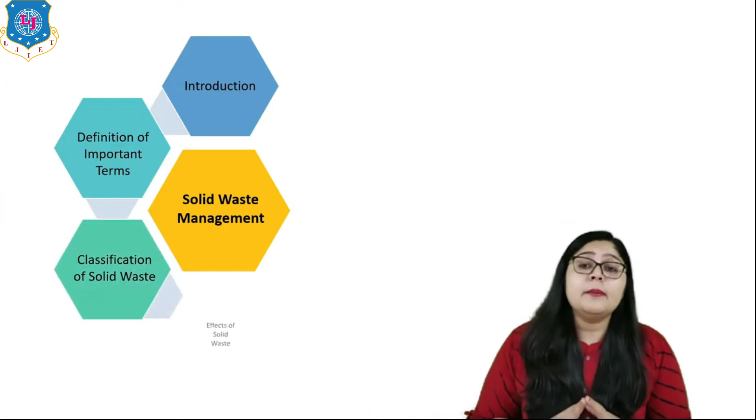Today, we are going to discuss advancement in civil engineering, lecture number 3. To understand solid waste management, first we have to understand the concept, the introduction. Then we will see definitions of important terms, then the classification and effect of solid waste, and lastly the quality and composition as well as the steps required for solid waste management. Let us begin with the introduction first.

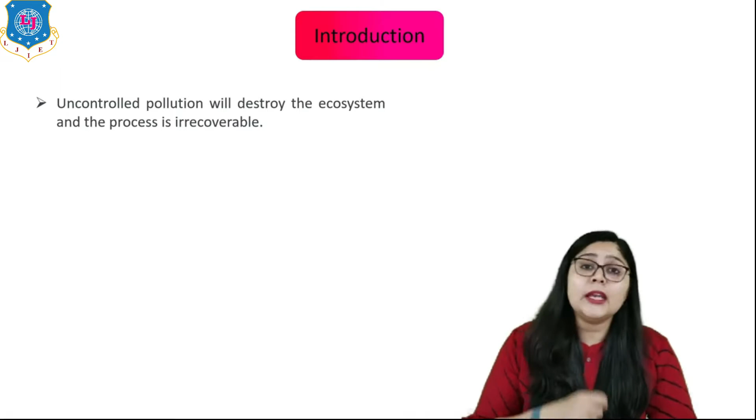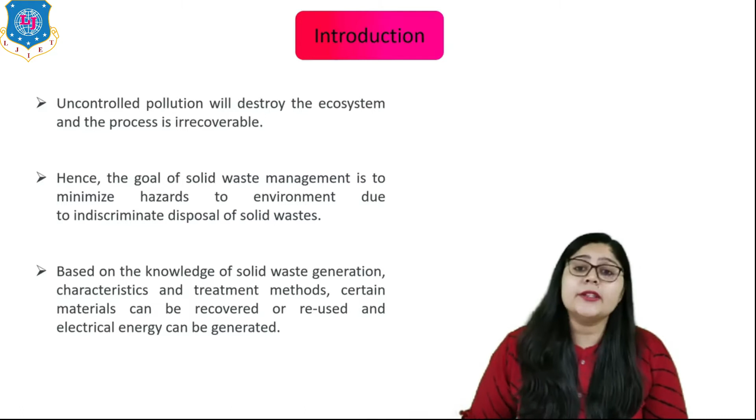For solid waste management, I can say that uncontrolled pollution destroys the ecosystem and the process is irrecoverable. So the goal of solid waste management is to minimize hazards to environment due to indiscriminate disposal of solid waste. Based on the knowledge of solid waste generation, characteristics and treatment methods, certain materials can be recovered or reused and electrical energy can be generated. So this is all about the introduction.

Now let us see the definition of important terms. The first definition is known as refuse. What is refuse? Simply, it includes all kinds of waste in solid state, excepting excreta, coming from residential, commercial and industrial areas.

The second term is house refuse. This consists of vegetable waste, ash, cinders, rubbish, debris from cleaning, animal waste matters, or debris from demolition of structures, which are part of house refuse.

The next term is street refuse. It consists of street sweeping, tree leaves, empty packets, empty match boxes, fruit peels, etc., considered as street refuse.

And lastly, the trade refuse. It consists of solid waste from industrial factories, businesses and commercial centers. So these are the refuse types: house refuse, street refuse and trade refuse.

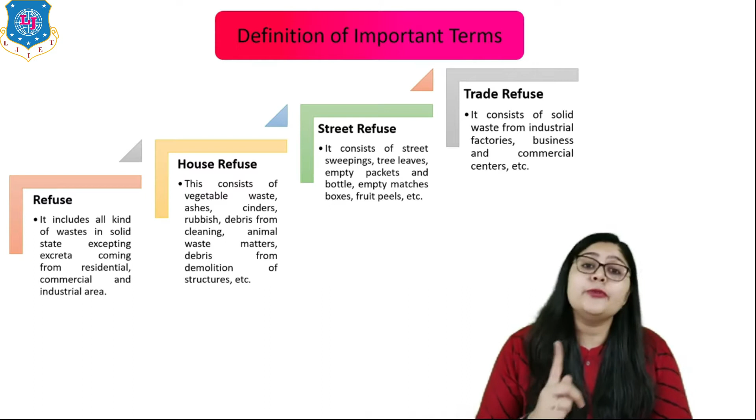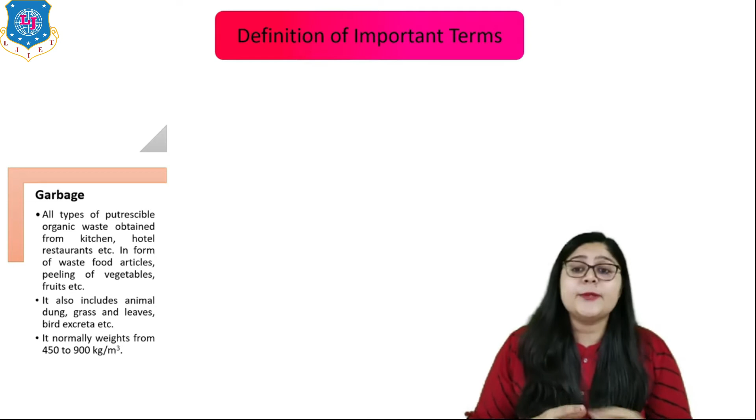Now let us understand the concept of garbage. It means all types of putrescible organic matter, or waste obtained from kitchens, hotels, restaurants, etc., in the form of waste food articles, peelings of vegetables and fruits. It also includes animal dung, grass, leaves and bird excreta. It normally weighs from 450 to 900 kg per cubic meter.

Now let us see the next term, which is ashes. Ashes are incombustible waste products, obtained from houses, industries, hearths and furnaces. It weighs from 700 to 800 kg per cubic meter.

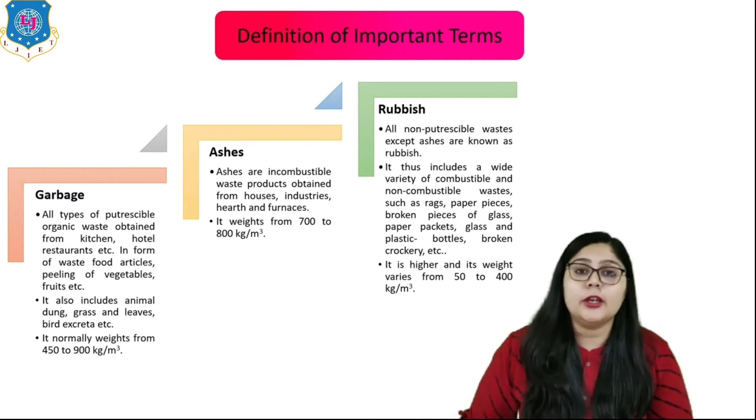And lastly, the concept of rubbish. All non-putrescible waste except ashes is known as rubbish. It includes a wide variety of combustible and non-combustible wastes such as rags, paper pieces, broken pieces of glass, paper packets, glass, etc. Its weight varies from 50 to 400 kg per cubic meter. So these three terms are very important.

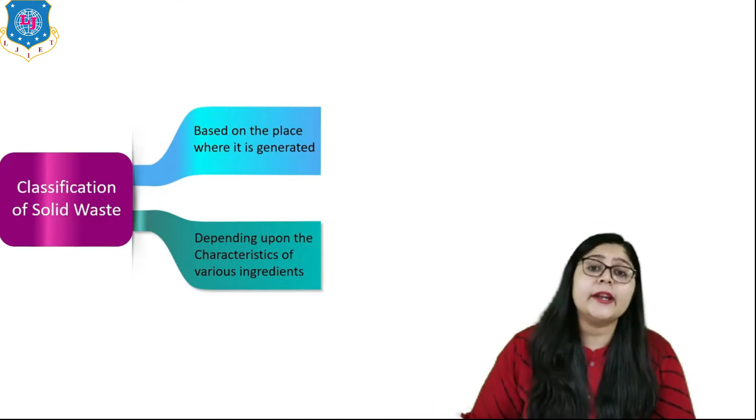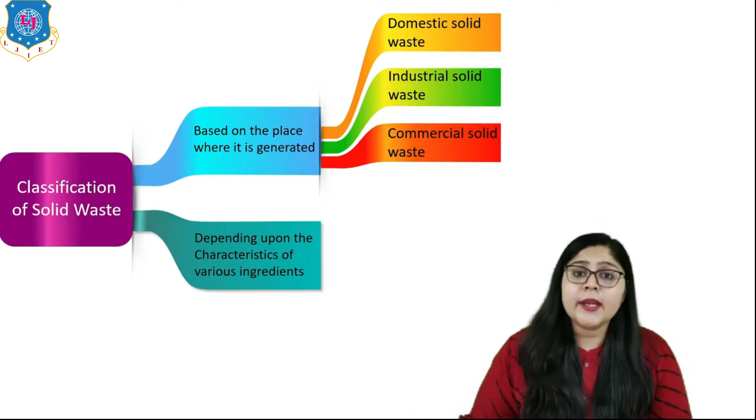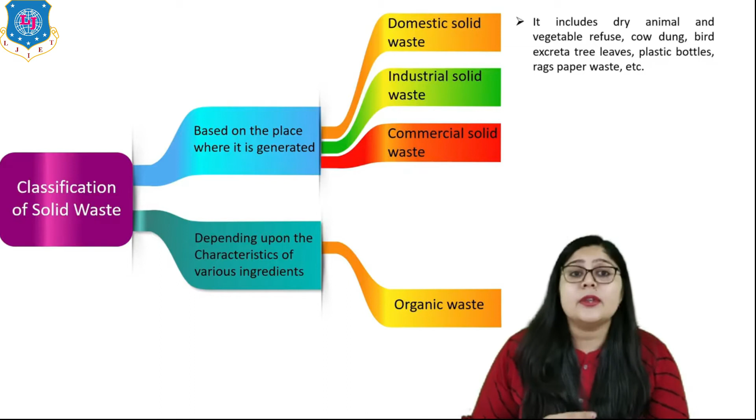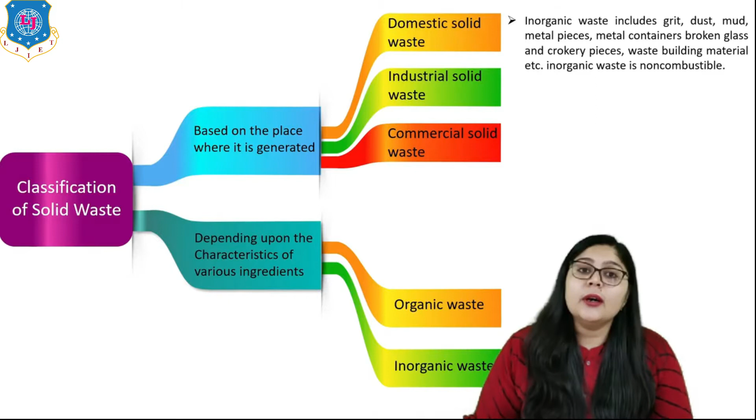Now, if I talk about depending upon characteristics of various ingredients, it means organic waste, which includes dry animal and vegetable refuse, cow dung, bird excreta, tree leaves, etc. And if I talk about inorganic waste, it includes grit, dust, mud, metal pieces, metal containers, broken glass and many things, which is non-combustible. So here you have understood the classification of solid waste.

Now let us move to the effect of solid waste.

The effects in which the solid waste changes properties of soil, air and water causing pollution is one of the major effects. Even the solid waste produces foul smell, breeds insects and organisms, and leads to spread of many diseases and infections, affecting human and animal population. Even harmful chemicals are released into the environment. So these are all the effects of solid waste.

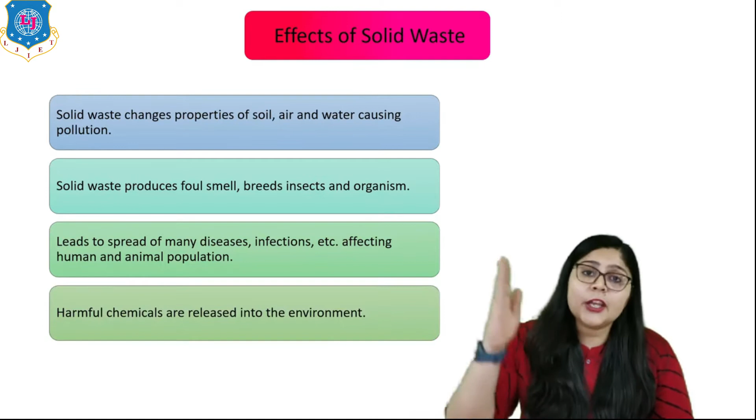Now let us move to the next topic, which is quality and composition of refuse. It varies from place to place and from season to season. Refuse produced by a society depends upon the living standard of its residents. The quantity of garbage depends on the food available, food habits and standards of living. It also depends upon whether the town is residential, commercial or industrial.

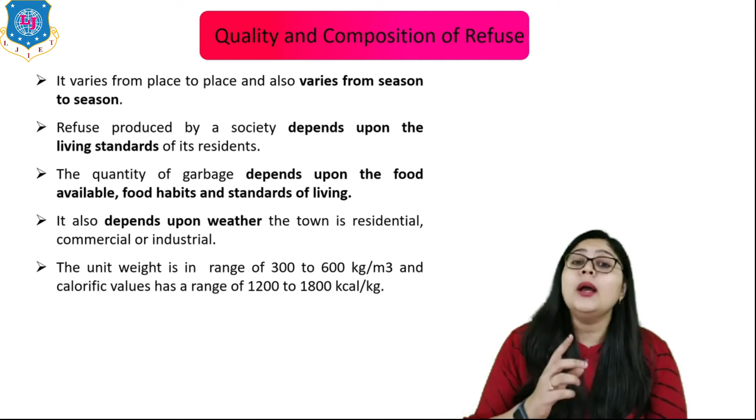Now let us move to the last and most important topic, which is steps for solid waste management. We have to follow 3 steps, of which the first is the collection and removal of refuse. Nowadays it is collected by door-to-door services provided by the municipalities. Sometimes public dustbins are provided by municipalities at convenient places by the sides of the road.

After collecting, we go for the transport of refuse. The refuse collected in public masonry chambers or big public containers or cans is transported to the disposal site by means of the following vehicles. The first is the auto rickshaw having a capacity of 0.5 to 0.75 tons. Even trailers have a capacity of 2 to 3 tons. And lastly trucks, which have a capacity of 5 to 10 tons. According to requirement, we choose the means through which we want to transport it. So this is all about transport of refuse.

Now let us see the disposal of solid waste or refuse. Basically there are 5 methods: first is composting, second is landfilling in low-lying area, third is incineration, fourth is pyrolysis and fifth is pulverization.

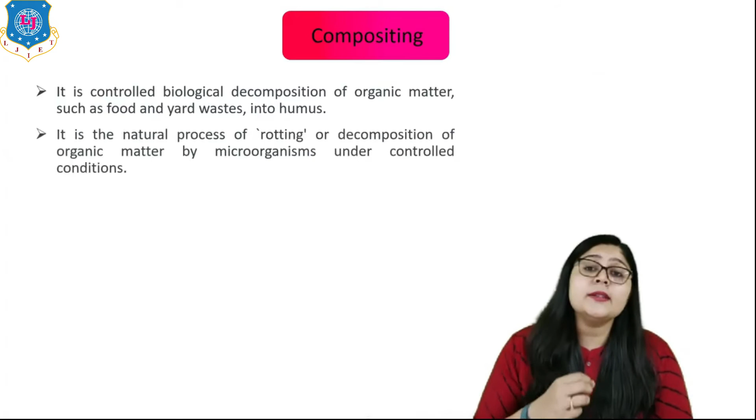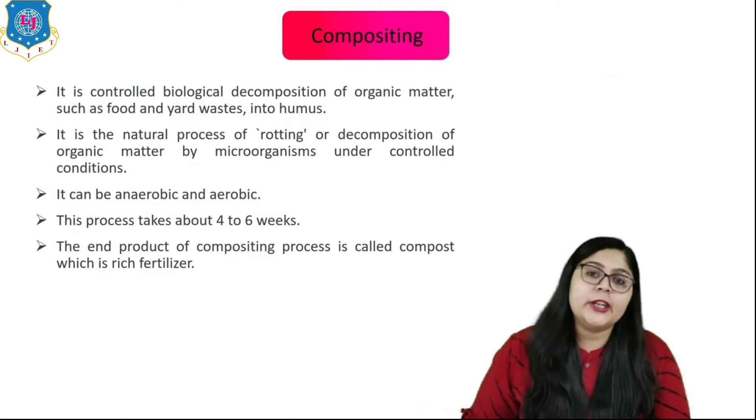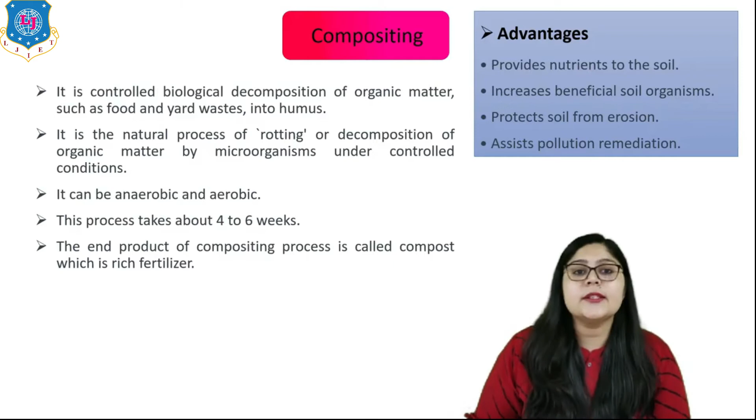Let us discuss the first one, composting. It is a controlled biological decomposition of organic matter such as food and yard waste into humus. It is the natural process of rotting or decomposition of organic matter by microorganisms under controlled conditions. It can be anaerobic or aerobic. This process generally takes 4 to 6 weeks. The end product of the composting process is called compost, which is a rich fertilizer. There are advantages like it provides nutrients to the soil, increases beneficial soil organisms, protects soil from erosion, and assists pollution remediation. So this is all about composting.

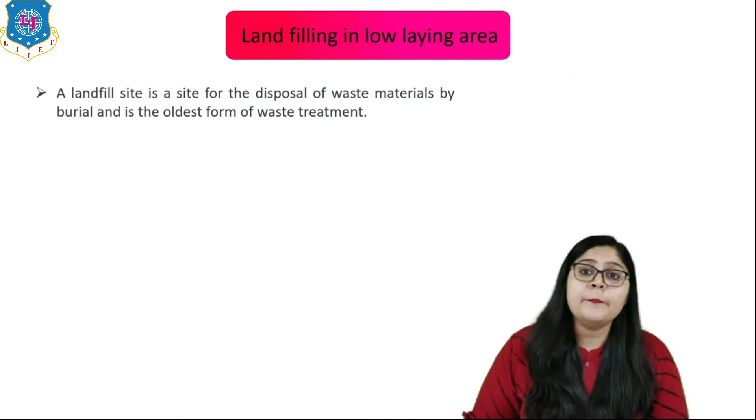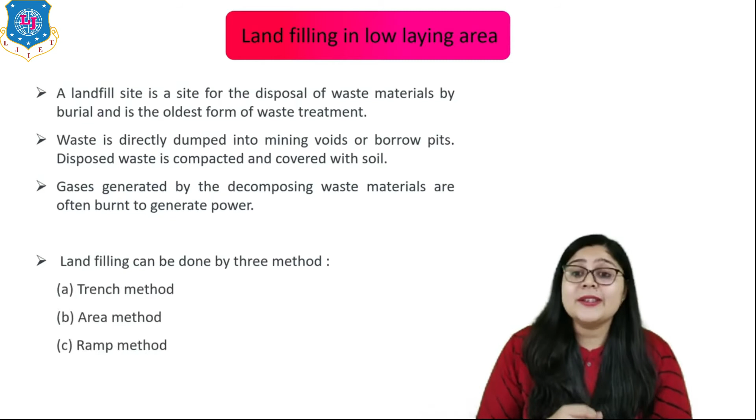Now let us see the second method, which is landfilling in low-lying areas. A landfill site is a site for the disposal of waste materials by burial and is the oldest form of waste treatment. The waste is directly dumped into mining voids or borrow pits. Disposed waste is compacted and covered with soil. The gases generated by the decomposing waste material are often burned to generate power. There are 3 methods: the first is the trench method, second is the area method, and lastly the ramp method. Let us discuss all of them.

For the trench method, it consists of an excavated trench into which the solid wastes are spread, compacted and covered. It is best suited for nearly level land where the water table is not near the surface.

Now for the area method, it is best suited for flat or gently sloped areas where some land depressions may exist. The wastes are spread, compacted and then covered.

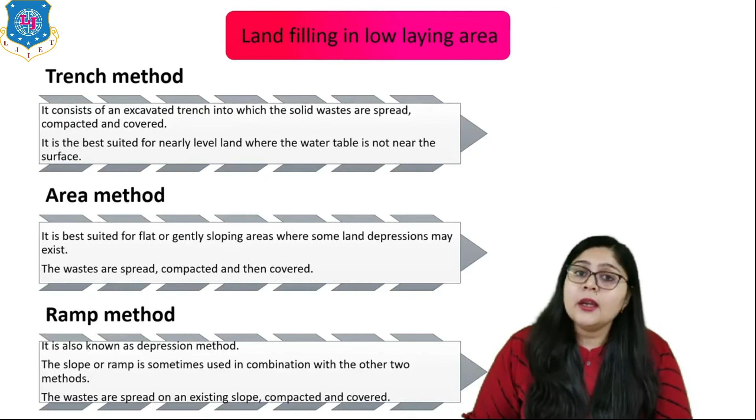Lastly, the ramp method, also known as the depression method, where the slope or ramp is sometimes used in combination with the other two methods. The wastes are spread on the existing slope, compacted and covered. So this is all about landfilling in low-lying areas - the three methods.

Now let us see the advantages. This method is very simple. There is no costly plant requirement. Separation of different components is not required. No residue or byproduct needs to be disposed. Even low-lying areas and land can be reclaimed through this method.

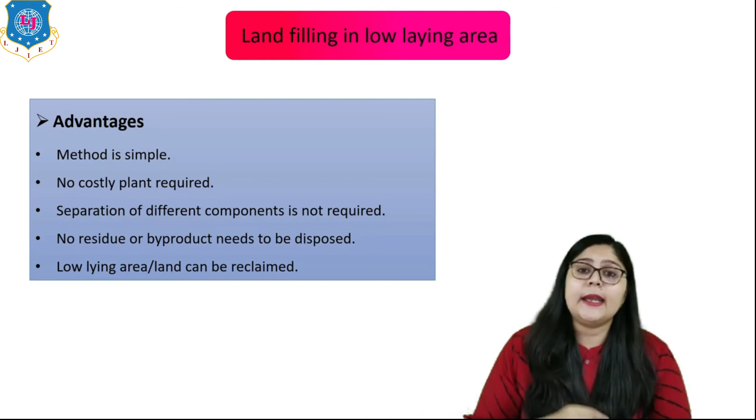As with any method, some disadvantages are also there. A proper dumping site may not be available. Large land area is required. Odor problems are created in the close vicinity of the site. Use of insecticides is required. Earth has to be borrowed from other places for earth layers, and landfills can pollute air, water and soil.

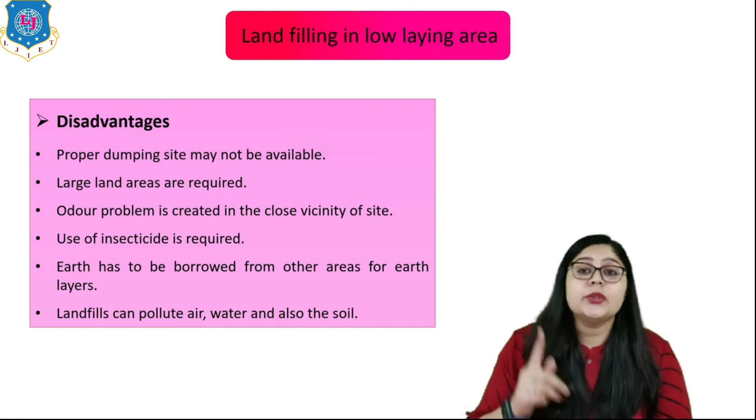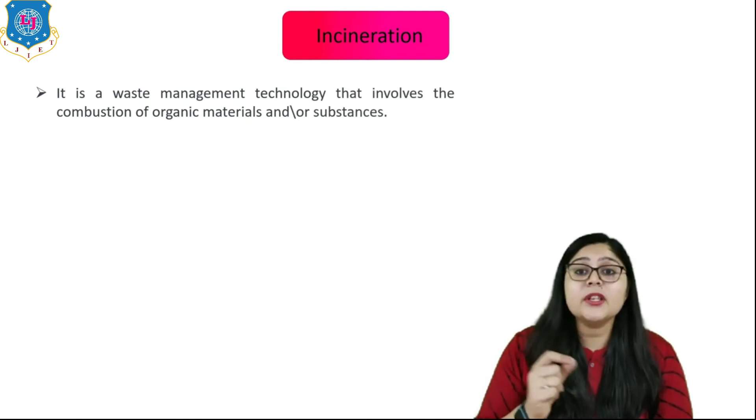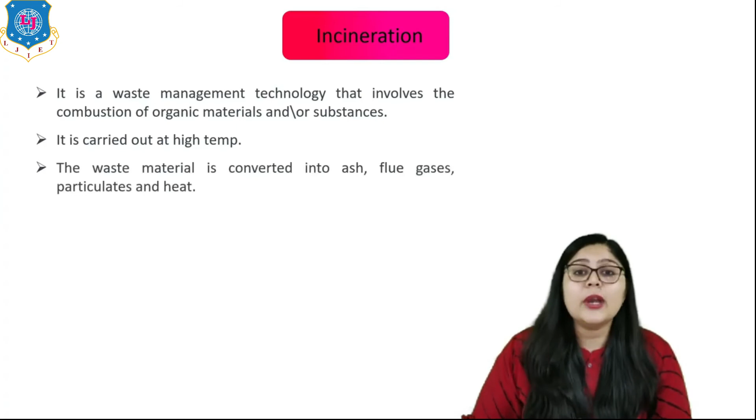So this is all for landfilling. Now let us move to the next term, which is incineration. Incineration is a waste management technology that involves the combustion of organic materials or substances, carried out at high temperature. The waste material is converted into ash, flue gases, particulates and heat. There are various types of incinerators, like moving grate, fixed grate, fluidized bed and rotary kiln.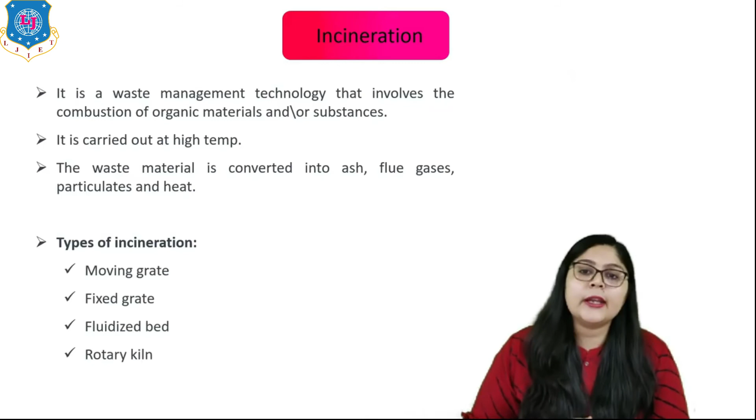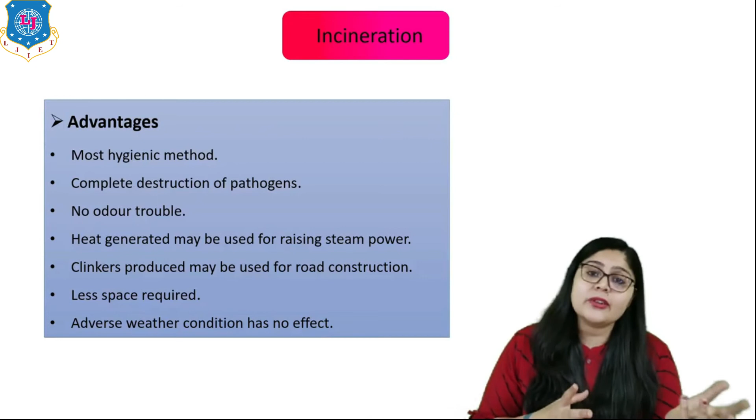Now there are some advantages: it is the most hygienic method, with complete destruction of pathogens and no odor trouble. Heat generated may be used for raising steam power. The clinkers produced may be used for road construction. Less space is required and adverse weather conditions have no effect.

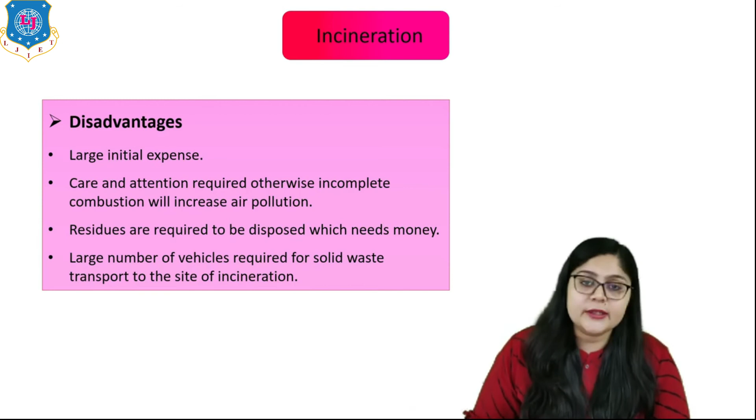There are some disadvantages too: large initial expenses are required, and care and attention are needed, otherwise incomplete combustion will increase air pollution. Residues need to be disposed of, which costs money. A large number of vehicles are required for solid waste transport to the site of incineration. So this is the concept of incineration.

Now let us move to the fourth method, which is pyrolysis. Pyrolysis is a thermochemical decomposition of organic material at elevated temperature in the absence of oxygen. It is carried out at a temperature between 500 and 1000 degrees Celsius, involving the simultaneous change of chemical composition and physical phase, and is irreversible. This means an external heat source is employed, and it yields gaseous, liquid and solid fractions. So this is all about the pyrolysis method.

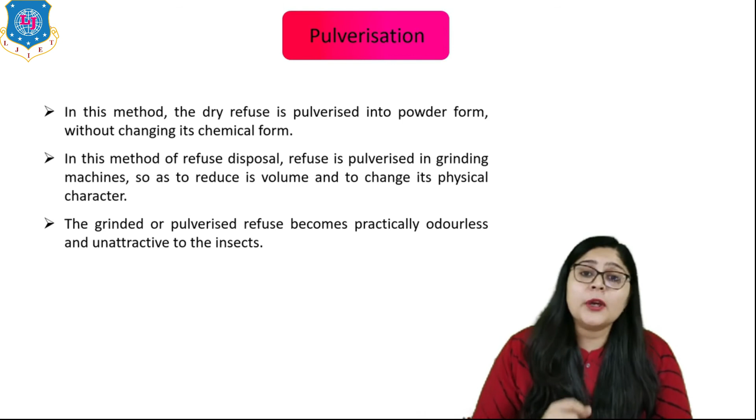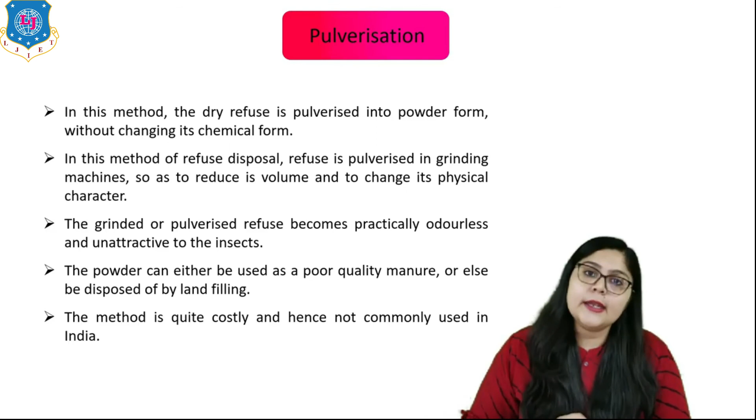Now let us move to the last method, pulverization. In this method, the dry refuse is pulverized into powder form without changing its chemical form. The refuse is pulverized in a grinding machine to reduce its volume and change its physical character. The pulverized refuse becomes practically odorless and unattractive to insects. The powder can either be used as poor quality manure or disposed of by landfilling. This method is quite costly and hence not commonly used in India. So this is all about pulverization.

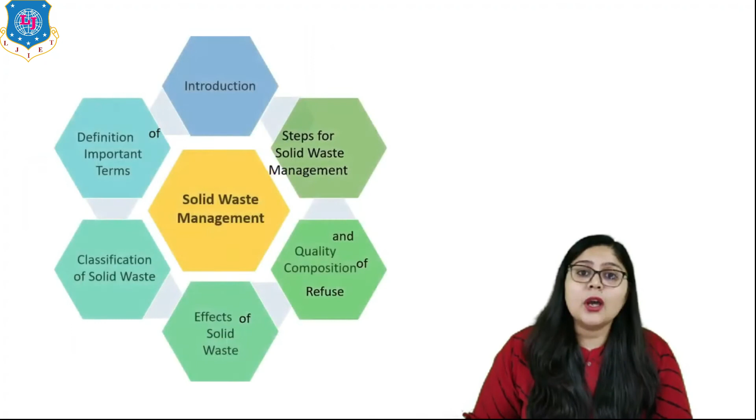So these are all the methods for disposal of refuse. These steps in the disposal of solid waste are very important. So this is all about solid waste management.